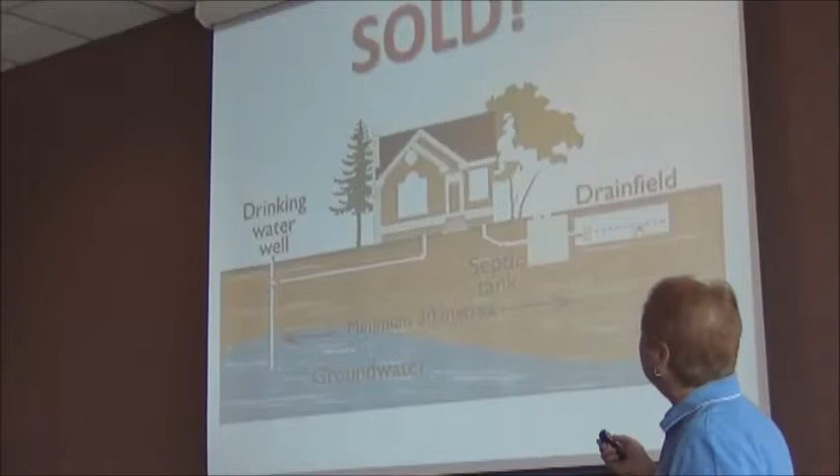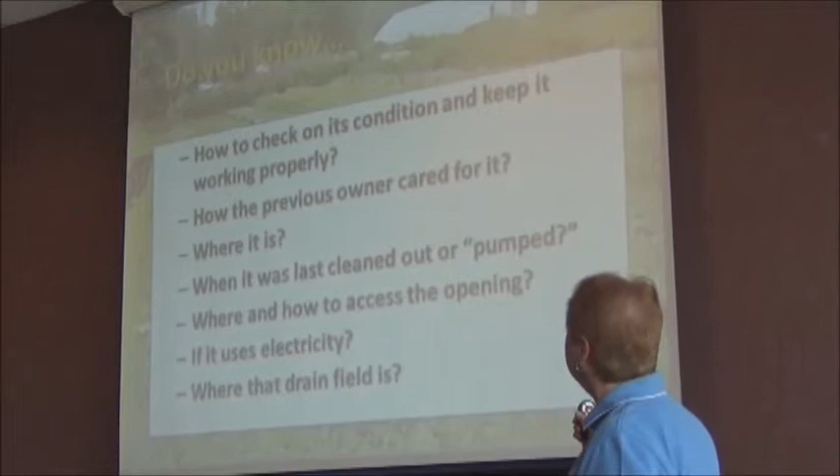I put together a PowerPoint designed to reach a variety of people, all age groups, all backgrounds. It's a brief explanation of why you should be concerned about your septic system. A lot of people go into home ownership in rural areas without really understanding how septic systems work, and these are questions they need to ask when researching a property.

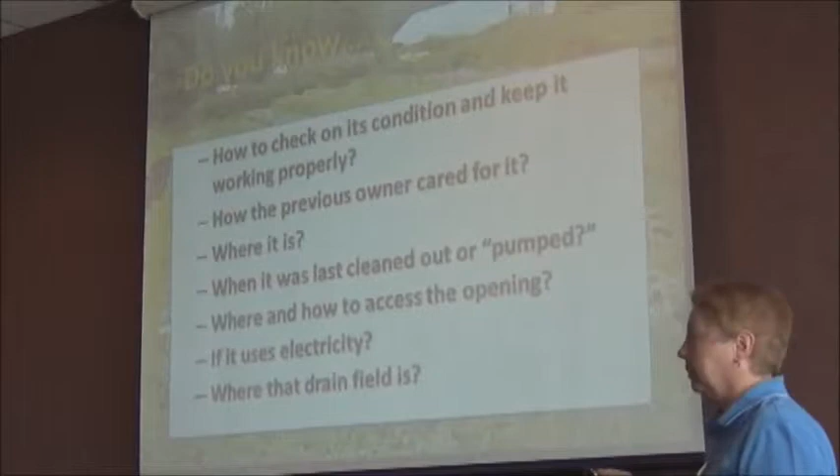An important person to consult about the septic system for a particular property is a realtor that you're working with.

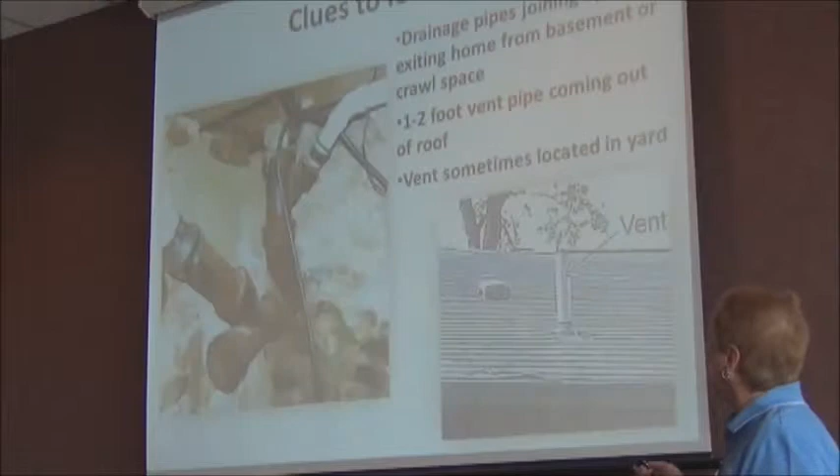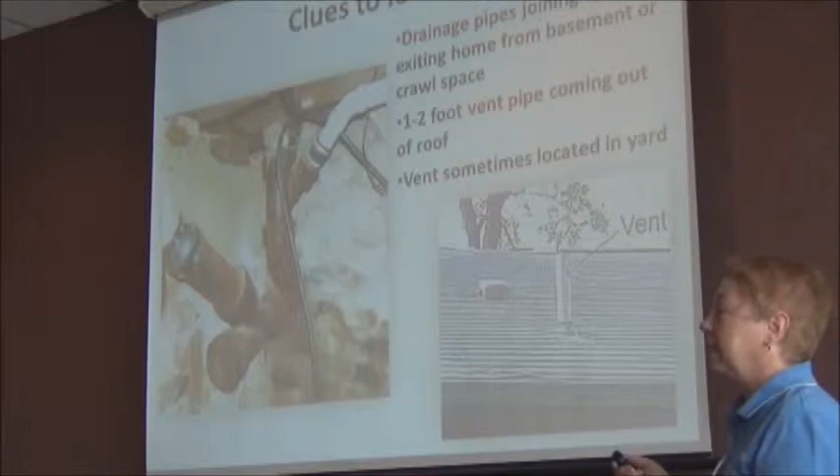Important questions to ask are: if you have a septic system, how is it working? Are you getting water from a private well versus public utilities? Sometimes there's not an understanding that you could be getting water from a public utility, but your wastewater is going into a septic system that can't handle as much water as you're using.

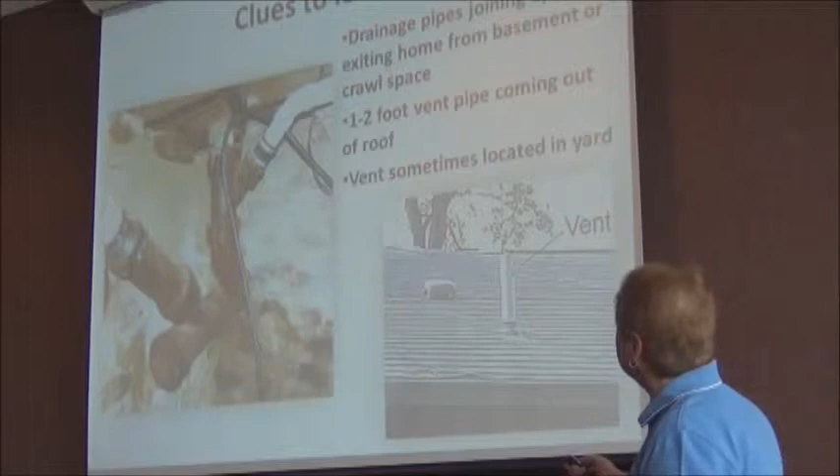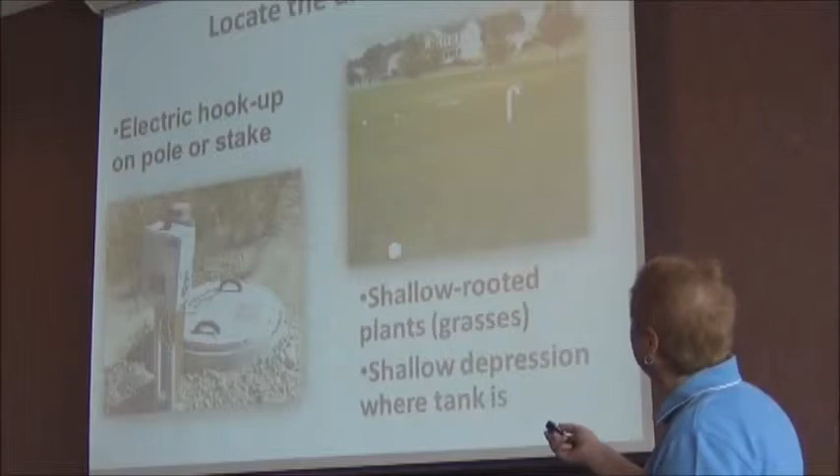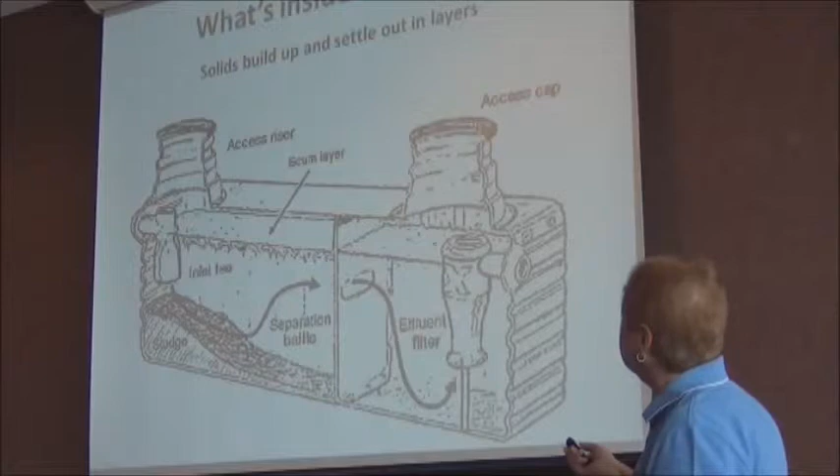As you walk the property, you're looking for clues as to what condition the septic system is in. You're looking at the pipes and installations around the property. You may need an electrical hookup for pumps, and look around for clear areas where your drainage field may be. A lot of people want to know what's inside the tank, and this helps them learn what different things are called - effluent, sludge, all the terminology.

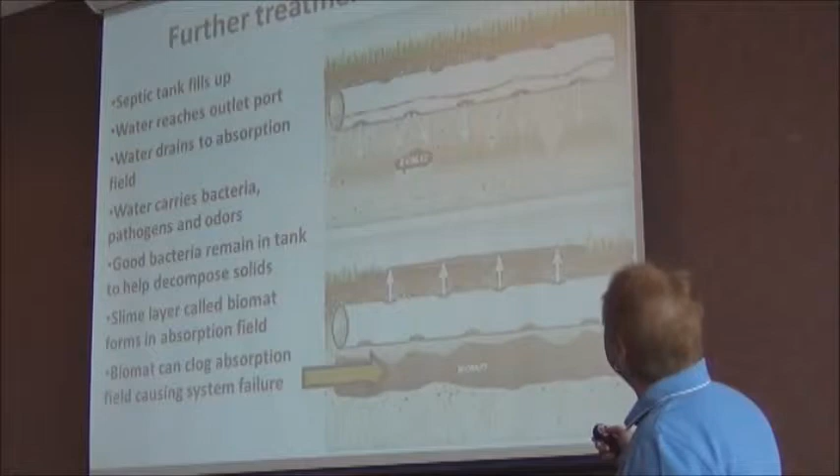Septic tanks, how they work in the soil. It fills in with the chemical processes that work through the septic fields.

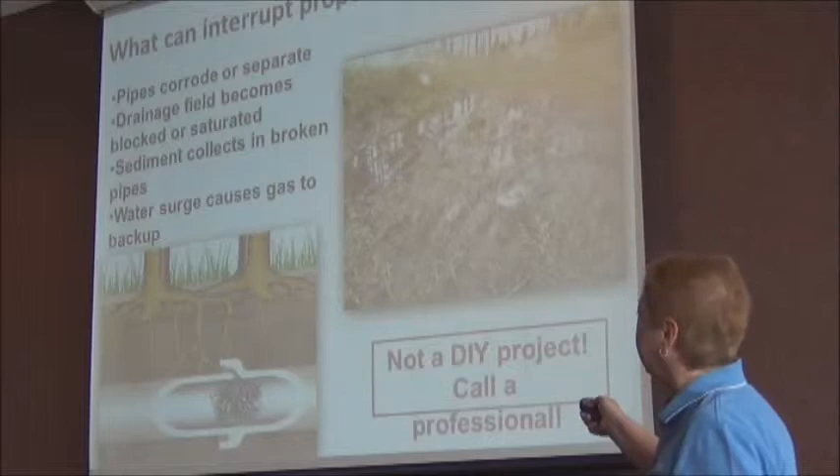Pictures are worth 1,000 words, I think, so this is the best way to disseminate the information to the folks we're trying to reach. What's underground can show up above ground in a bad way. And we have a word of caution here: this is not something you can fix on your own. There are gases and things you need to worry about.

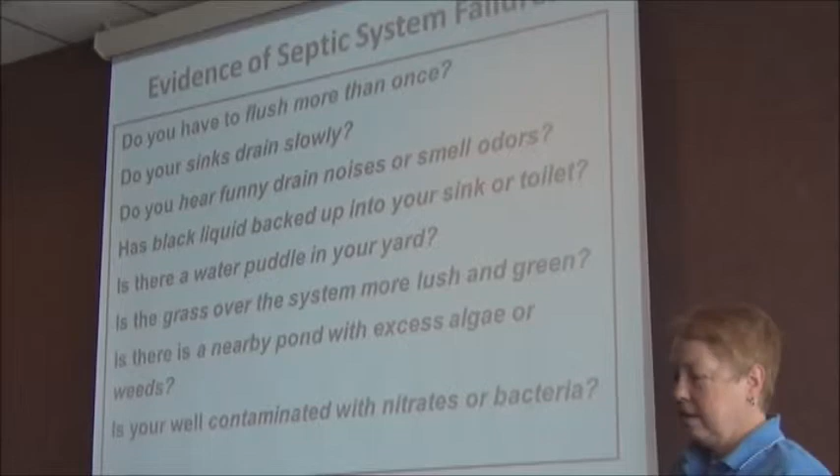These are the things you need to look for within your home and around your home if you're experiencing a problem. A lot of people wouldn't know if they walked by a puddle in their yard that might mean their septic was overflowing. And it's important to know who your partners are.

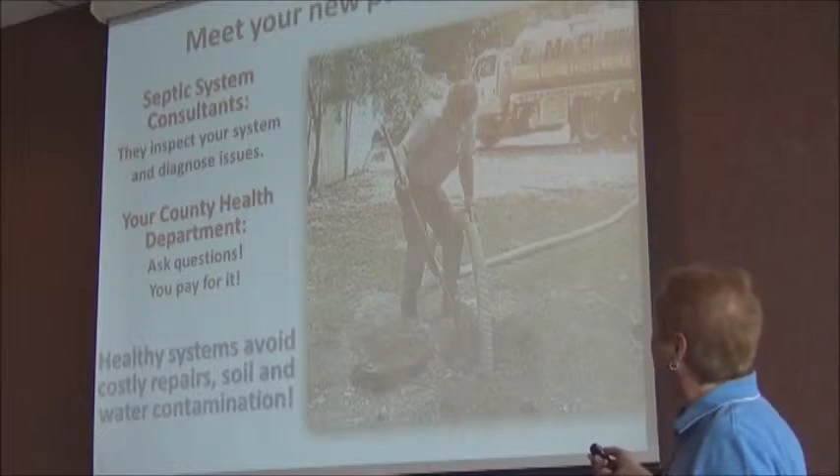You have pumpers who will be glad to come out and help you with any problems, and your county health department can also give you background about how to avoid problems with your septic tank. Get in the habit of calling out the pumper truck to keep problems at bay.

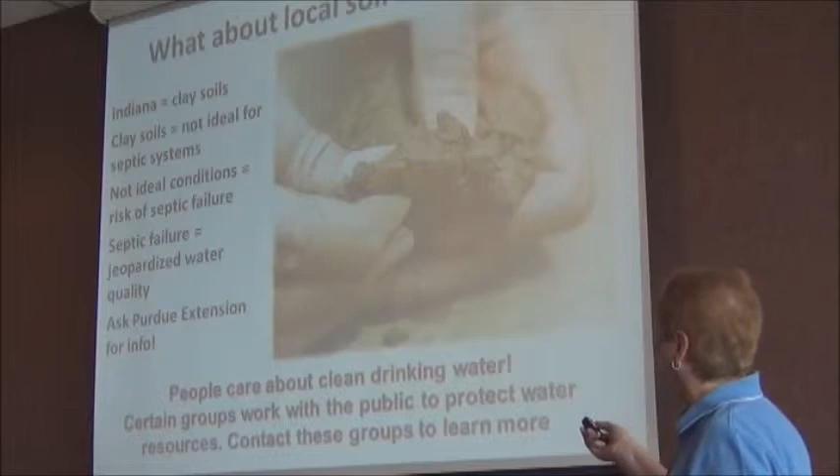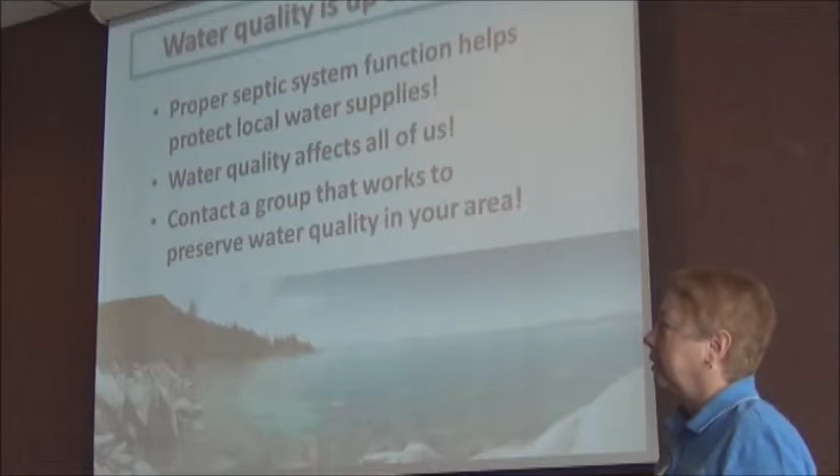Know about your soil conditions in the area. This is Indiana - soils are very gummy. This is where we also start to introduce people to groups that will work to help them protect their water and all of our water. Be on the lookout around your neighborhood and work together, because water quality applies to all of us. Thank you.

The title of our video, and unfortunately due to technical difficulty we can't show it to you, is 'Where Does the Poop Go?' The concept behind the video is basically the concept that was outlined in the PowerPoint.

We took all of those elements. We went to my property - I live in rural Noble County. Our team gathered together, we did the video, and talked about all of the things you see: where the well is, where the septic system is, how you can look at the house from an internal perspective.

We did it on the basis of a homeowner who was selling their house. So we had a realtor, a prospective client, and the homeowner all in the video talking about all the things related to septic systems. Very simple concept, and I overlaid it with some music that you'll hear shortly, which played right into our septic song that's part of our presentation.

Doing the video was fun. We ended up with some of the same technical difficulties with sound quality, video quality, and things like that. But my goal is, even after Laura and I fought through the process for 2 days trying to get the video to work, that we're going to reformat it, clean it up, and make it available, because I believe it's something simple, conceptually.